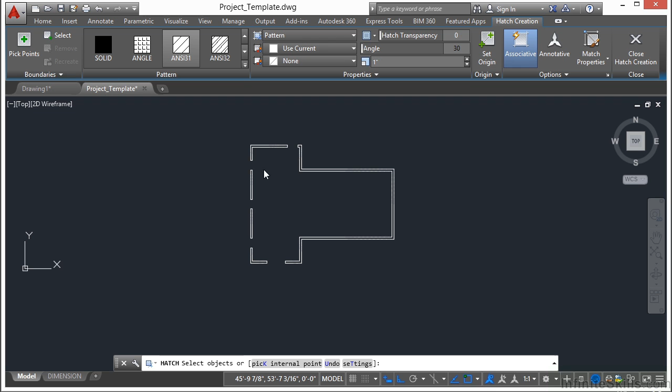We want to use a hatch pattern of ANSI 31, with an angle of 30 degrees. Let's pick inside our objects using the pick points option. That pattern is a little too tight, so let's give it more, setting the scale to 20. That looks good, so that's the pattern we'll use: ANSI 31 at 30 degrees with a scale factor of 20.

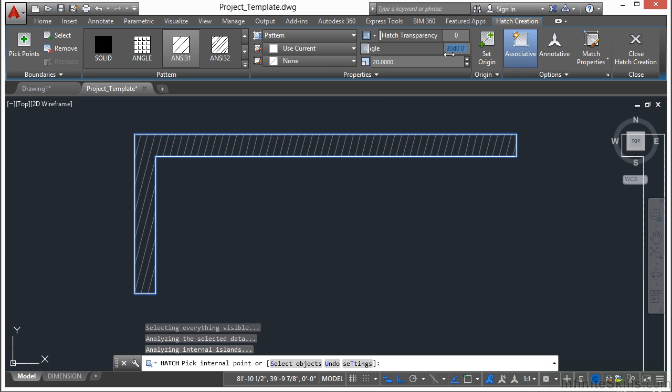We're going to pick inside each of these objects. Sometimes when you zoom in too closely, AutoCAD just kind of freaks out and can't handle it, so you just have to zoom out a little bit, pick in the exact same spot, and it still works. I know it's crazy, it's really annoying, but that's just one of the little things about AutoCAD.

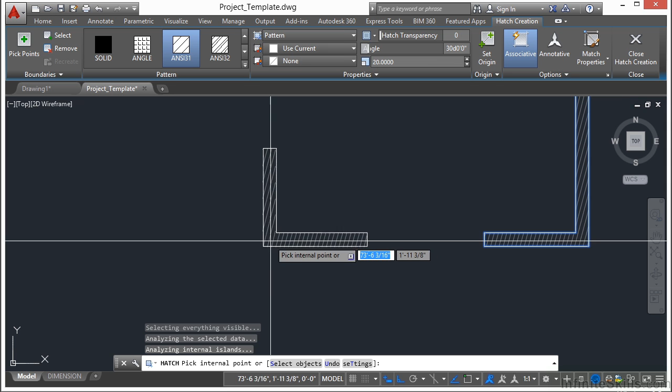So just keep filling in each of these wall sections with your hatch pattern until you get them all filled in. When you're finished, press enter. So there's our exterior wall with a little bit of a hatch.

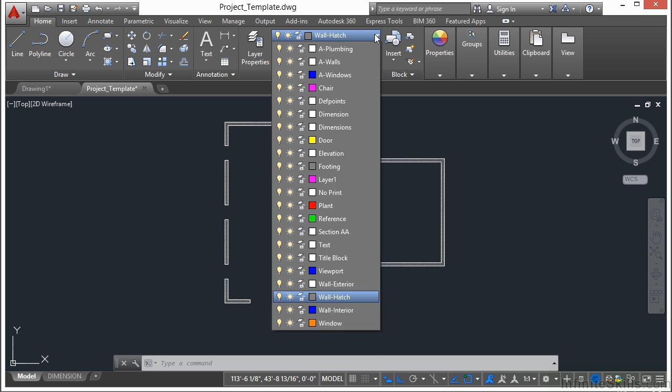Now we need to put in a few interior walls, so let's change our layer to Wall Interior. Start the line command, and we're going to start off right here, snap to this endpoint, and draw it straight down to this endpoint. Press return, now we're going to offset this line.

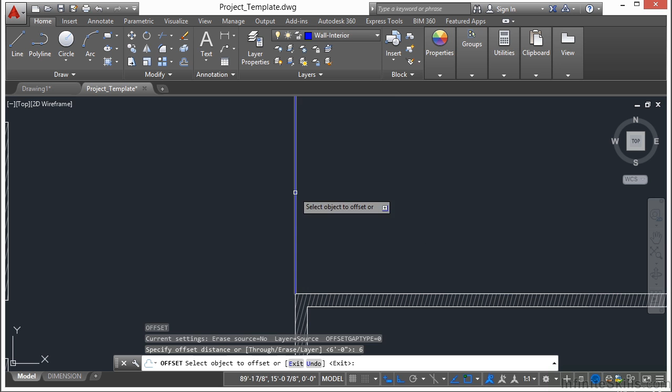Offset it 6 inches, and offset that to the right. Now we need to offset from the top 12 feet, press enter, and we're going to select this line here and go down. There it is.

Use your match properties command, type in MA, press enter. Since this is going to be an interior wall, select one of your interior walls that you've drawn here and select that item. That way it will look the same.

Use the extend command, select this line here, press enter, and pick that one. Press return again. Now we need to offset this line, make it 6 inches. Pick that and to the bottom.

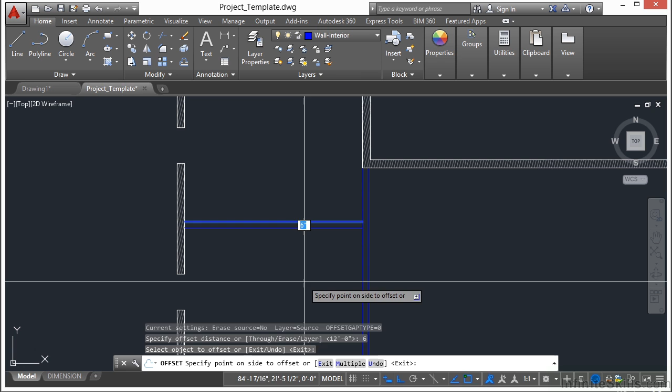So now we're going to put a doorway in right here. We'll use the offset command, 1 foot 4 inches, press enter, select that line, offset to the right. Offset again, 3 feet, press enter, select this line and offset it in.

Now use match properties again. Type in MA, select this line, and then pick these two, so they're all on the interior wall layer. Use the trim command, select all these items, press enter, and trim it up so that we have this nice little opening. Now we're going to put a little doorway here.

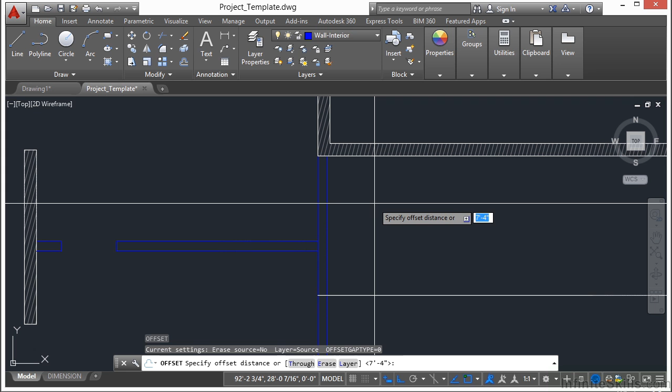Offset again, 7 feet 4 inches. Select your line here, move it down. Press return, offset 6 feet. Select the line and go down. Press return, type in MA for match properties.

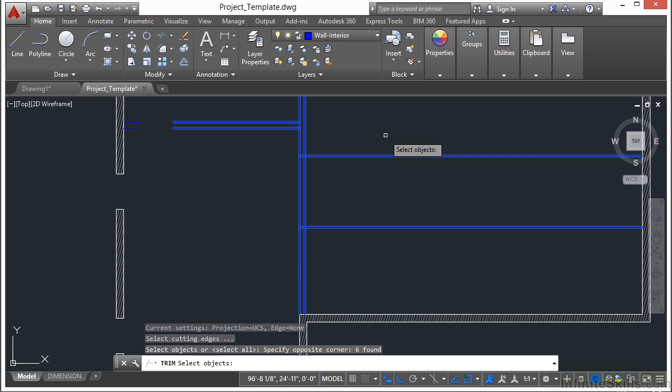Select the blue line and then pick these 2 white lines. Press enter and then trim. We're going to trim all of this up here, so select all of these lines. Press return, trim those away, and get that little bit out of there too.

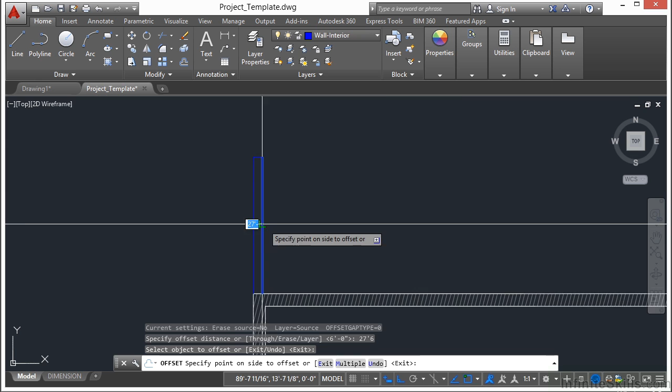So now we have our exterior walls, we have our interior walls, and the last thing we need is to put a little movie screen. So we're going to offset 27 feet 6 inches, pick this line here, go to the right, click, and return. And then use the extend command, select that line, press enter, come down here and pick the blue line so that now it goes all the way across our room.

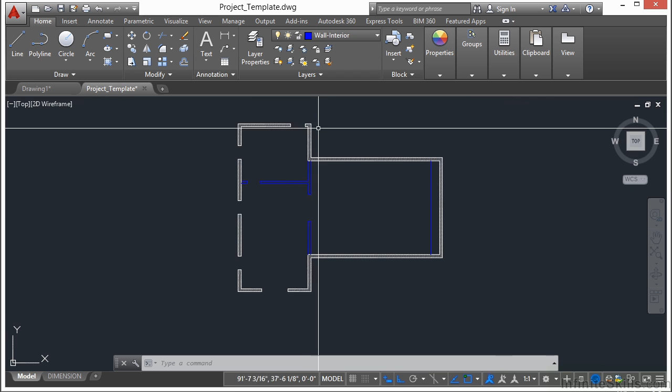And now we're almost done with our model. We just have a few more things that we're going to do in the next section. We're going to insert the doors, the windows, some plants, and some chairs.